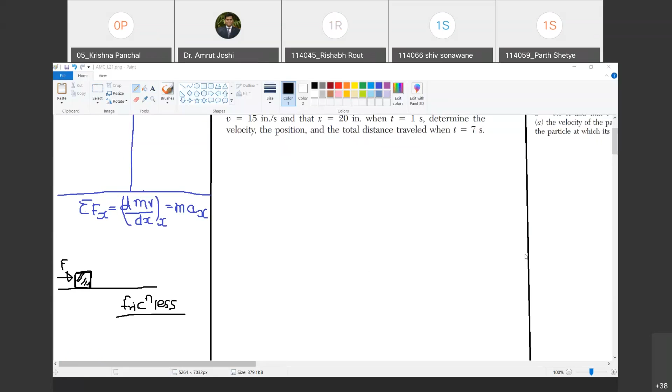Hello, sir. Yes. Who is this? Sir, I got the unmute request now. Who is this? Sir, Rishabh Raut. Okay, Rishabh, did you listen to me when I asked you to unmute? Sir, I listened, but the chat box wasn't opening as well. My entire WebEx was glitching, and I got the request now. Okay, no problem. Henceforth, if such a thing happens, just put the message on WhatsApp at that time. Sir, I have. Okay, great. So I would anyway consider that. Sorry, you are Rishabh, right? Yes, sir.

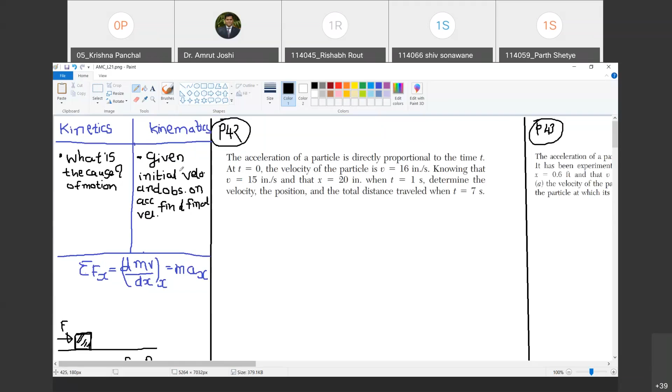So given initial velocity and observation on acceleration, find what will be the final velocity at the end of 5 seconds. Here it may be at the end of 10 seconds, 20 seconds, whatnot. Are you with me? Yes, sir. Final velocity. This question I have listed under kinematics. Happy? Are you with me? Yes, sir. Okay. Let me ask one more question.

The question that I'm going to ask is, let us say this block is acted upon by the force of 100 Newton. Are you with me? Yes, sir. 100 Newton, and the mass of the block is 20 kg. The surface is frictionless. What is the acceleration in x direction, or in the direction of the force, that this block possesses? Is the question that I have asked. Are you with me? Yes, sir. The second question I ask, if I double the mass for the same force, what happens to the acceleration? Are you with me? Yes, sir.

So how are you going to calculate it? You are going to use Newton's second law. 100 is equal to 20 into a. So you will get a. If you double it, it will be 40 into a. You will get the value of a. So second question. For a given force and mass, compute acceleration. Are you with me? Yes, sir. Compute. I have listed this question under kinetics.

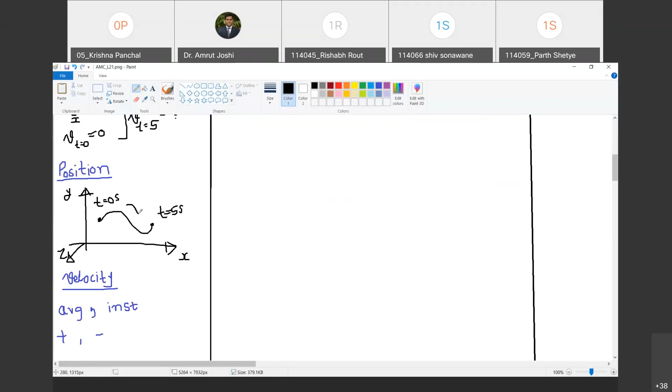And at time t equal to 5 seconds, it has acquired this position. Are you with me? Yes, sir. And during this time interval, the path that is followed is this one. This is the path followed by the object from t equal to 0 to t equal to 5 seconds. This is the direction of motion. Happy?

Are you with me? Okay. Now, as I plot this path, you have to understand that each point on this path has been realized at different instants of time. Though I have plotted it as a graph, all the positions on this graph have been achieved by the object during different intervals of time. Do you agree with me?

Yes, sir. So therefore here, the time which is not seen on the XYZ axes is called an implicit parameter. क्या बोलेंगे इसको? Implicit parameter. So whenever I draw a path in space followed by the object, each position on that path is achieved by the object at different instants of time. So as the particle moves from one point to another point in space, the time is evolving implicitly. It will not be seen on the graph, but it is evolving implicitly. Are you with me? Yes, sir. So time is an implicit parameter.

Unless I say this is the position corresponding to t equal to 0 and this is the position corresponding to t equal to 5 seconds, I will not be able to grasp what is happening in time. Do you agree with me? Whether this particle has covered the distance in 5 seconds, 10 seconds, 12 seconds, 1 hour, 2 days, this will all be unknown unless I specify it. Are you with me? Yes. Okay. Therefore, time is implicitly evolving along the path.

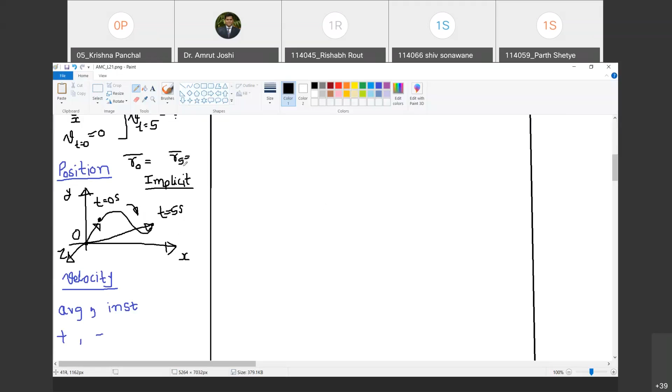Now tell me, what is the position of the particle at t equal to 5 seconds? Bolo? Sir, origin to that. Yeah. So this is r bar at t equal to 5 seconds. This is the position at t equal to 5 seconds. Do you agree with me? Just give me a minute. Let me take this down. Very carefully listen to what I am trying to say. Bring all your consciousness to your ears. This is a very important concept.

Now, if I ask you, what is the change in position that the object has displayed during 0 to 5 seconds? तो मुझे क्या करना पड़ेगा? So let me now name these position vectors. I am going to call it R0 bar. Are you with me? Yes. And I'm going to call this R5 bar. So what is R5 bar? R5 bar is the position of the particle at t equal to 5 seconds. And R0 corresponds to the position vector of the particle when t equal to 0 seconds. Do you agree with me?

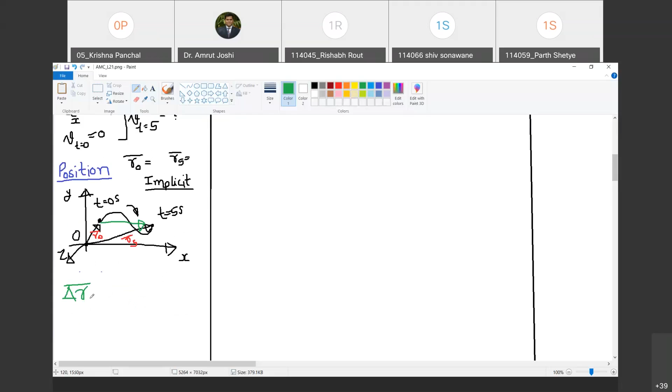And now what is the change in position? Change in position is nothing but this vector, if you agree with me. Yes, sir. This is the change in position. Are you with me? Yes, sir. So how do I represent this vector? I represent it as delta r bar from 0 to 5 seconds. Do you agree with me? Yes, sir. It is the change in position vector as the particle moves from the position at t equal to 0 to t equal to 5 seconds. Agreed? Yes, sir.

Now, second question. What is the relationship between R0, R5 and delta R 0 to 5? तो देखो ये ट्रायंगल लॉ दिख रहा है कि नहीं? R0 bar, देखो R0 bar plus this delta R bar. Do you agree with me? Yes, sir.

By triangle rule, this addition has to be equal to R5 bar. Do you agree with me?

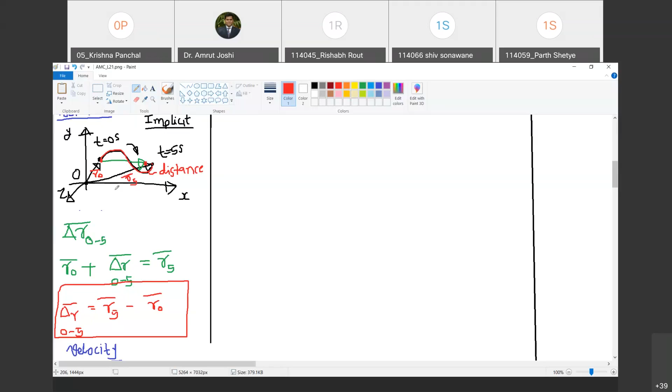Yes. Is it same as magnitude of delta r bar? No, sir. Delta r bar's magnitude is only this much. Do you agree with me? Yes. So delta r bar's magnitude gives you the shortest distance, straight line distance between the position at t equal to 0 second and t equal to 5 second. But it does not give you the total distance traveled by the object. Do you agree with me? Yes, sir. So we have to be very careful while defining the position. Position is not by any means the distance traveled by the particle. Only under certain circumstances change in position and distance traveled will be same. Are you with me? Yes, sir.

So summary point number 1, you have to understand change in position from t equal to 0 seconds to t equal to 5 seconds is not same as the distance traveled by the particle during time t equal to 0 second to t equal to 5 seconds. Agreed? Yes, sir. Okay. So now we define unambiguously what is a position of a particle, and we have to understand that it is a vector quantity. Change in position is what we are interested in. Are you with me? Yes, sir.

Because if you change the origin, R0 bar and R5 bar, their expressions are going to change. Do you agree with me? Yes, sir. But is delta R bar going to change? No, sir. For example, if I shift the origin somewhere here, what is R0 bar? This vector. What is R5 bar? This vector. But has delta R bar changed? No. So second point of observation. If you change the reference coordinate system, if you change the origin, delta R bar, change in position vector during 0 to 5 seconds does not change. What changes is position vectors at t equal to 0 and t equal to 5 seconds. Are you with me? Yes, sir.

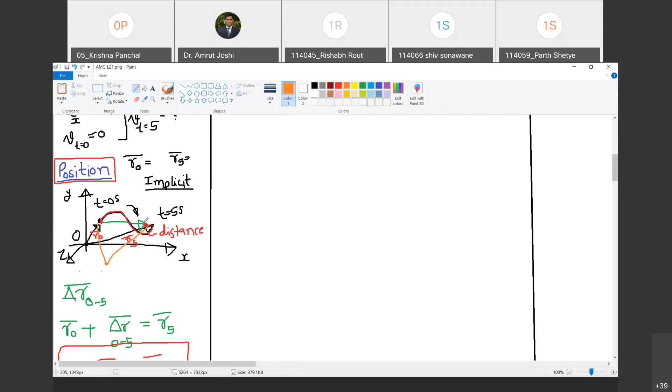Okay. So therefore, we are not interested in these temporary changing quantities. We are interested in the quantity that remains unaltered under coordinate transformation or under shift of origin. Are you with me? Yes, sir. And which is the quantity that remains unaltered? Delta R bar. So most often while observing the motion, we will be interested in change in position rather than the position itself. Are you with me? Yes, sir. Okay. There are some instances where we will also have to deal with the position, but I am making a crude statement. 90% cases we will be interested in change in position during a particular time duration. Are you with me? Yes, sir.

Okay. So now, how do you define velocity? Tell me. So velocity is the change in position per unit time. Yes. So if I express velocity as dr bar by dt, it won't be wrong. Do you agree with me?

So dr bar by dt. I'm sorry, dr bar by dt. Do you agree with me? Yes, sir. This is the velocity vector. Are you with me? But now we are going to define two types of velocities. Which velocities? One is called as average velocity and the other is called as instantaneous velocity. Are you with me? Yes, sir.

So let us now define what is average velocity. Average velocity v bar average is defined over a time interval t equal to 0 to t equal to t. And how do we define it? We define it as average velocity during time interval t1 to t2, where t2 is greater than t1. Are you with me? Yes, sir.

So average velocity during time interval t1 to t2 is position vector at time t2 minus position vector at time t1, divided by delta t. Delta t is nothing but t2 minus t1. Happy? Yes. This is how we define the average velocity. Are you with me? Yes, sir.

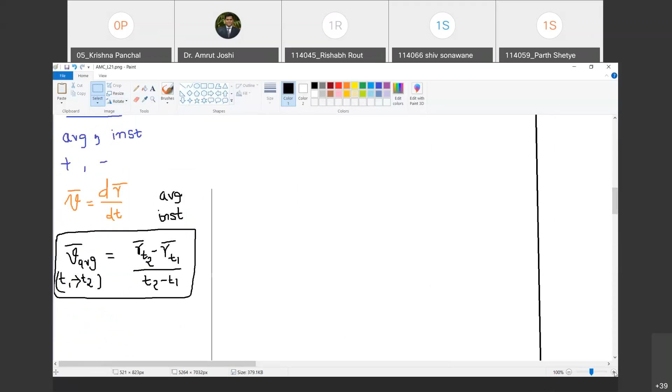So I define instantaneous velocity, v instantaneous, which I'm going to call simply v bar, as the limit as t2 minus t1, that is delta t, tends to 0 of r(t2) bar minus r(t1) bar, divided by t2 minus t1. Are you with me? Yes, sir. This is the instantaneous velocity at time t1.

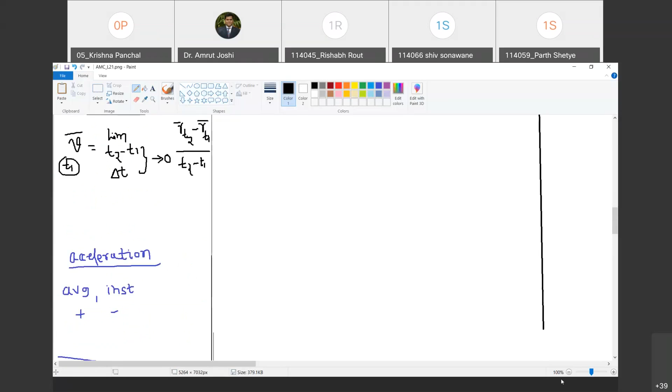Why at time t1? Because t2 minus t1, delta t, is tending to 0, so it is as if t2 is t1 itself. Are you with me? Yes, sir. So the instantaneous velocity at time t1 is defined in this fashion. Now how does it look graphically? Let me show the graph as well, so that you will better understand this.

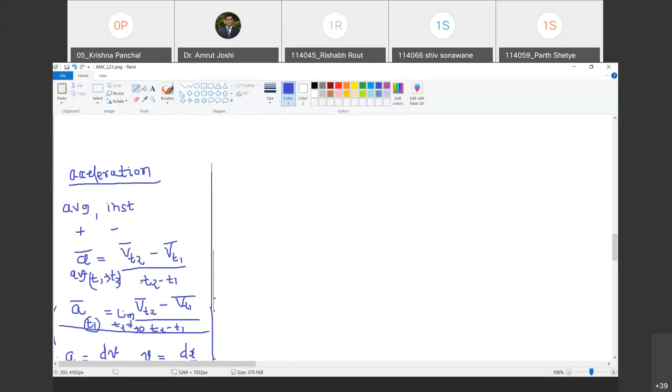Yes, sir. And now let us write down instantaneous acceleration. So a bar instantaneous at t1 will be given by vt2 bar minus vt1 bar divided by t2 minus t1, such that the limit delta t, t2 minus t1, tends to 0. Are you with me? Yes, sir. This is how we define the instantaneous acceleration. Now we are going to start with rectilinear motions.

Are you with me? So what is rectilinear motion, Krishna? Motion along a straight line. Yes. So it is the motion along the straight line. Do you agree with me? Yes, sir. Now, if the motion is going to occur along a straight line, then the direction along which motion occurs we are going to call x. So if the motion of the object occurs along this direction, I am going to simply call this direction x. Are you with me? Yes, sir.

I am not interested in y position because the object is moving along the line, so it is not going to move perpendicular to the line. So this direction itself, I call it x. Are you with me? Yes, sir. And then I choose an origin. Now the position of a particle with reference to this origin, though it is a vector quantity, will be easily given by plus or minus sign. Yes, sir. So if it is on positive side of x-axis, the position will have positive value. If it is on negative side of the x-axis, it is going to have negative value. Do you agree with me?

Yes, sir. हाँ. So therefore अब जरा position vector के terms में देखते हैं. देखो, if at time t equal to t1, the object was here. So what is r t1 bar? r t1 bar is along the line and it is this one. Do you agree with me? Yes, sir. At time t equal to t2, let us say the particle has assumed this position. So what is r t2 bar? r t2 bar will be this line along the same direction. Yes, sir. And what will be the delta r bar? This will be delta r bar. Do you agree with me? Yes, sir.

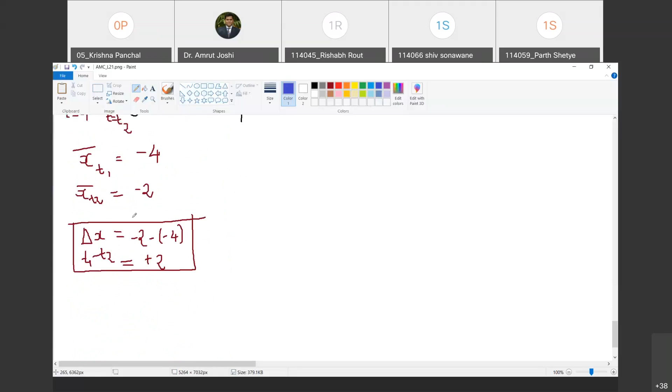Yes, sir. So therefore, change in position is positive during time t1 to t2, but position itself at t1 and t2 is negative. Position vector has negative connotation. Are you with me? So I hope you are very clear about the positive and negative sign of position and change in position. The same discussion is valid for velocity as well.

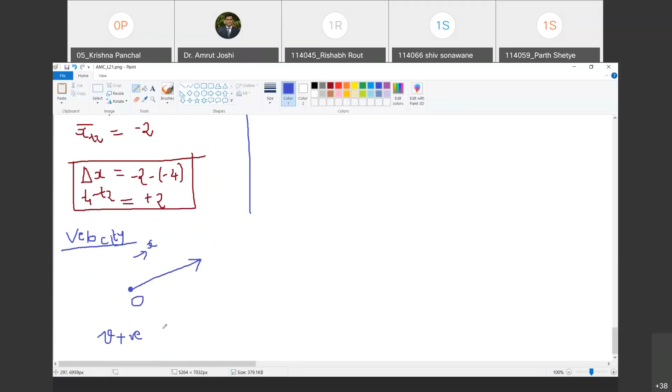Now tell me, when do you say that the particle is possessing positive velocity? Sir, when it is moving away from origin. Moving? Moving towards the positive x direction. Yes. So now we are discussing all this in context of rectilinear motion. So therefore, if this is the origin and the object is moving in this direction, and if I call this direction as positive x, then I will say velocity to be positive only if it is directed along positive x-axis. Do you agree with me? Yes, sir.

X-axis. So for velocity, it is fairly easy to understand when velocity is positive and when velocity is negative. Happy? Yes, sir. Now let us do that exercise for acceleration as well. Are you with me? Yes, sir. So for acceleration,

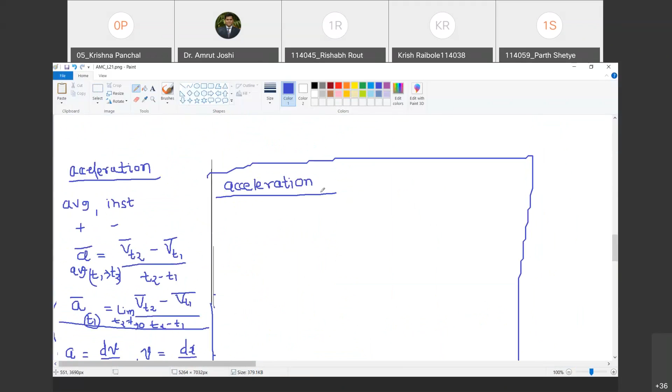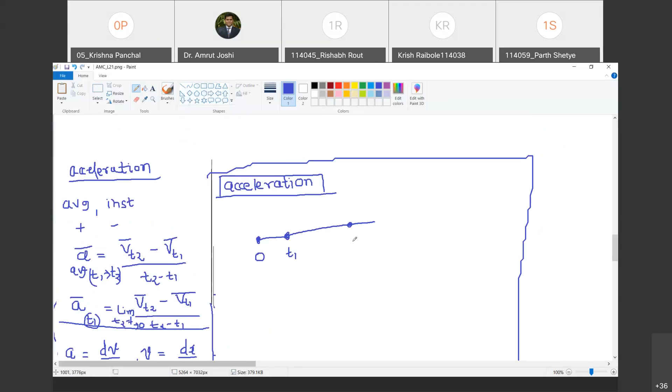so this is the x direction. Let us say this is the x direction. This is the origin. Are you with me? Yes, sir. Now I am going to take peculiar examples. Let us say the position at t equal to t1 is this. Are you with me? Yes. And position at t equal to t2 is this. Happy? Yes. So this is x1 and this is x2. Are you with me?

Yes, sir. Now tell me, what about the change in position? Is it positive or negative? So change in position, delta x bar, and let us take these values. Let me take x1 is equal to 2 and x2 is equal to 3. Are you with me? Yes. So what is delta x bar during t equal to t1 to t equal to t2? Tell me. Sir, x2 minus x1, 3 minus 2, 1. So even the positions were positive and change in position during time t1 to t2 is also positive. The object has moved in the positive x direction. Do you agree with me? Yes, sir. Okay. Now, second thing.

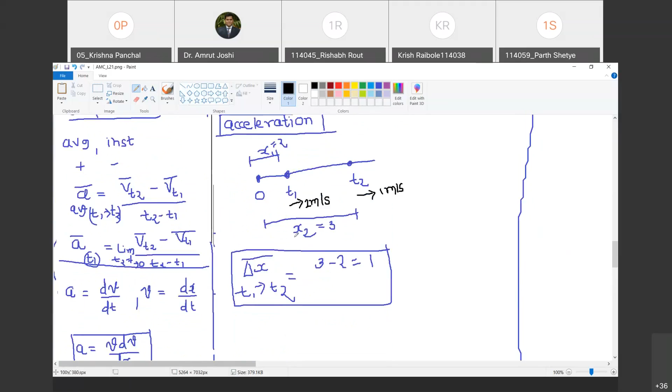Let me say the instantaneous velocity at t1 is 2 meter per second. Are you with me? Yes, sir. And instantaneous velocity at time t2 is 1 meter per second. Are you with me? Yes, sir. Okay, chalo. So now tell me, what is the average velocity during time interval t1 to t2? Tell me, average velocity. So average velocity from t1 to t2.

So क्या करना पड़ेगा? 3 minus 2 divided by, बोलो, t2 minus t1. Do you agree with me? Yes, sir. Is t2 minus t1 positive? Yes. Is numerator positive? Yes. Therefore, this average velocity is positive. Do you agree with me? Yes, sir. So it says that the average velocity is directed in positive x direction. Happy? Yes, sir.

What can you say about average acceleration during time t equal to t1 to time t equal to t2? Chalo. At t2, the velocity is 1 meter per second and plus because it is in positive x direction. Do you agree with me? Yes, sir. At t1, velocity is 2 meter per second and plus because it is in positive x direction. Do you agree with me? Yes, sir. So therefore, this will be divided by t2 minus t1. Is t2 minus t1 positive? Yes, sir. And what about 1 minus 2? It is negative. So what is average acceleration? Negative. Are you with me?

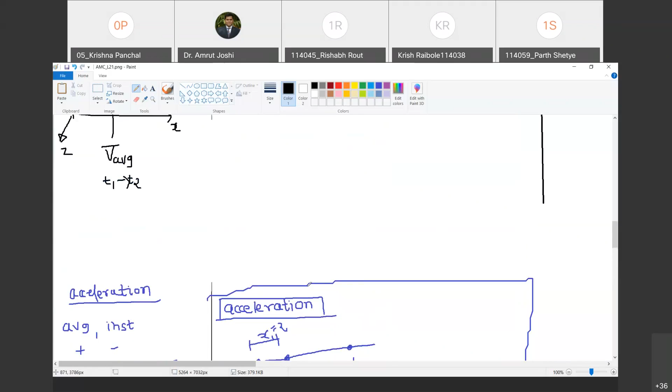So not necessary that if the change in position is positive and average velocity is positive, the acceleration also should be positive. ऐसे जरूरी नहीं है. Are you with me? Yes, sir. So when do we say the acceleration is negative? One of the possibility is the object is slowing down in positive x direction. Do you agree with me? Yes, sir. So acceleration negative कब है? When it is slowing down in positive x direction. Acceleration is positive when object is speeding up in positive x direction. Do you agree with me?

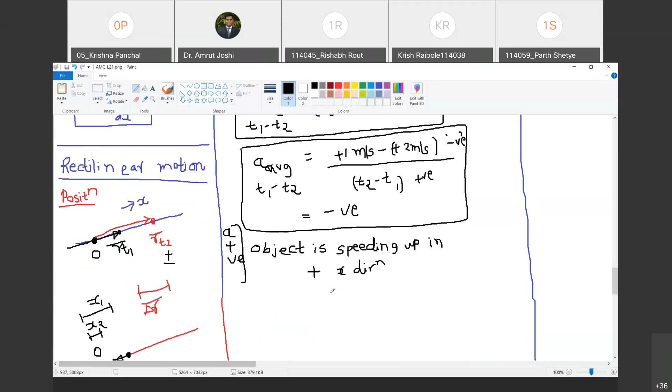Happy? Yes, sir. अच्छा, अब जरा और एक चीज देखते हैं. Let us say this is the origin. Are you with me? Yes, sir. At time t equal to t1, this is the position, which I am going to call x1, is equal to 3 units, let us say. And at time t equal to t2, this is the position, which I am going to call x2, which is 1 unit. Are you with me? Yes, sir. So this is at time t equal to t2. This is at time t equal to t1.

Now tell me what happens to the position. Position कैसा है बताओ? Change in position, delta x bar, during time t1 to t2 is what? Tell me. 3 minus. No, 1 minus 3, divided by t2 minus t1. Do you agree with me? No, sir.

T2 minus T1 नहीं आएगा ना? Why? Change in position from t1 to t2, right? Change in position during t1 to t2. So t2 minus t1 ही तो आएगा. Are you with me? So this is positive, do you agree with me? But this is negative, which indicates that the change in position is negative. That means the object has traveled in negative x direction. Do you agree with me?

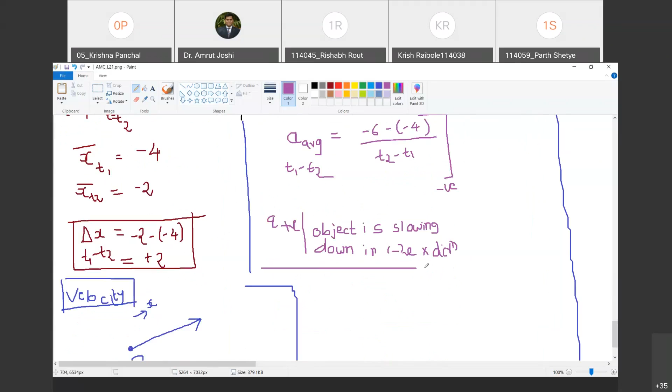Yes, sir. So when is acceleration positive? When the object is speeding up in positive x direction, and second, when the object is slowing down in negative x direction, then also acceleration is positive. Are you with me? So acceleration positive है कि नहीं ये देखने के लिए थोड़ा tricky है. So there are two conditions when acceleration is positive: either the object is speeding up in positive x direction or it is slowing down in negative x direction. Otherwise we call the acceleration negative.

Now some books use the word deceleration. I won't use the word deceleration. Deceleration is a deceptive word. Don't use it. We will simply say whether the acceleration is positive or negative. Because if you start using deceleration, it confuses you. The object is speeding up, still we call it deceleration. Why? Because it is speeding up in negative direction. Therefore, we should use only positive acceleration or negative acceleration. Try avoiding the word deceleration.

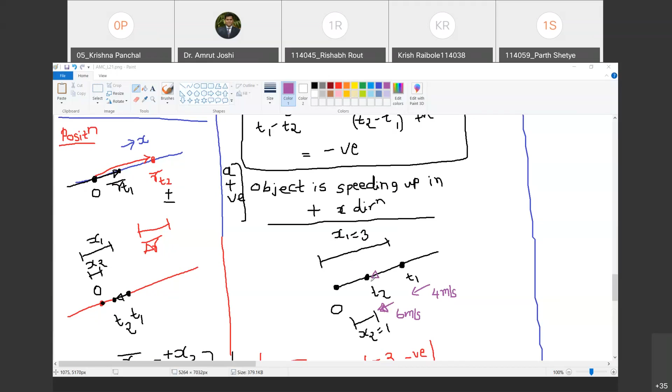Okay. So we have now understood position, change in position, velocity, change in velocity, acceleration, change in acceleration, average and instantaneous values of velocity and acceleration. When is position positive? When is change in position positive? When is velocity positive? When is average velocity positive? When is acceleration positive? When is average acceleration positive? ये सारी चीजें हमने आज सीखी है, pertaining to rectilinear motion. We are going to use these while solving problems in tomorrow's class.